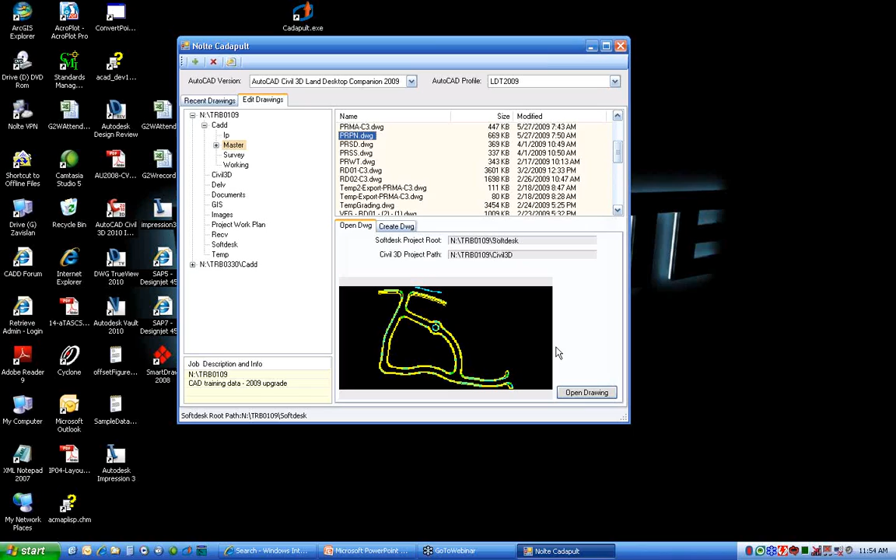So let me go ahead and open that up. You'll see that Cadapult did not have any tools to create or select a Softdesk project. The reason we chose not to do that is it was just a lot of extra work for us - we're going to rely on Land Desktop to manage and maintain our projects for us.

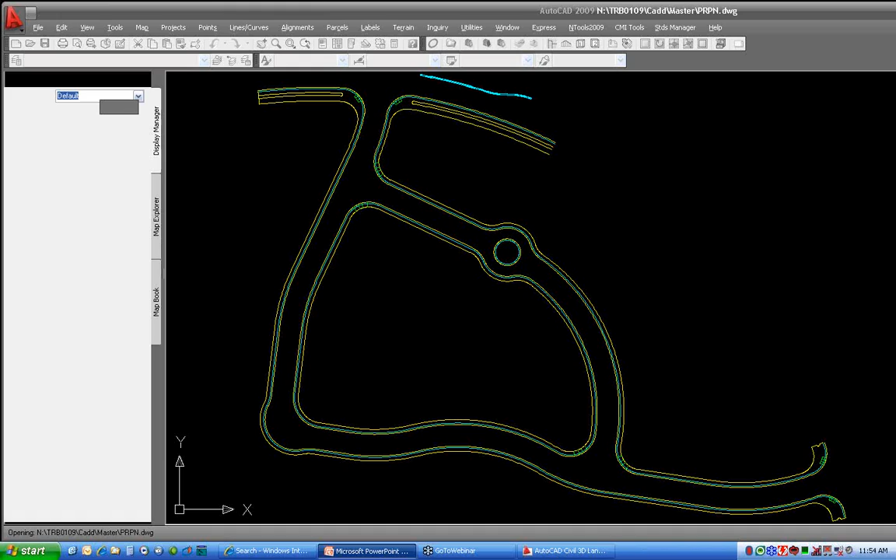So as this fires up here, and I apologize - you should notice that the 2009 products do take a little bit longer to load the first time every day compared with 2007. Just like any software, you add more functionality, it's going to require more hardware, more RAM, more memory, more resources, so it will take a little bit longer to open these files than what you're used to in 2007. If you're finding it's drastically slower, where it took only a minute in 2007 but takes 5 minutes in 2009, then you need to work with your PC analyst - there's probably some hardware configuration issues we need to correct.

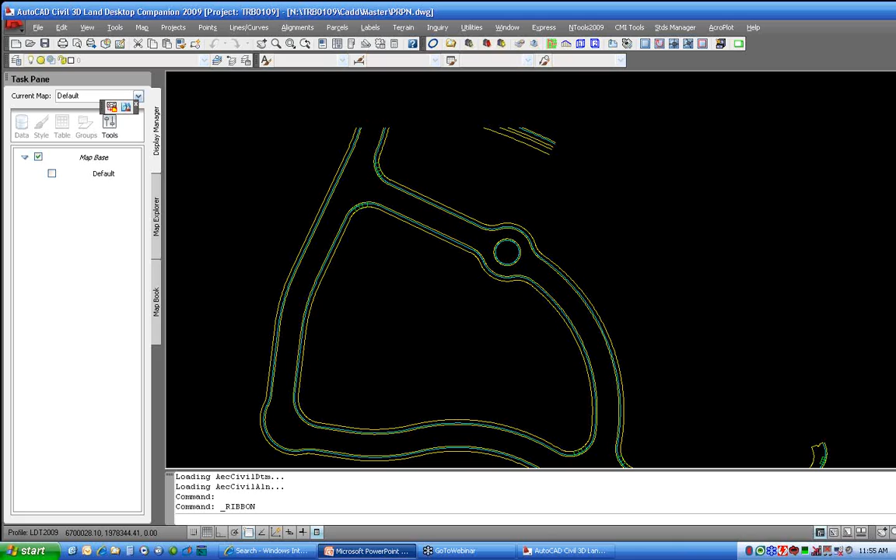All right, so come in - I'm in my Land Desktop, and what you'll see is the first time you come into a drawing that does not have a project associated to it, you will get this dialog here where it's going to ask you to select or create a project. You do need to make sure, again, if you use Cadapult correctly, it should have the right job number, and then you should be able to select from the list of projects in that job.

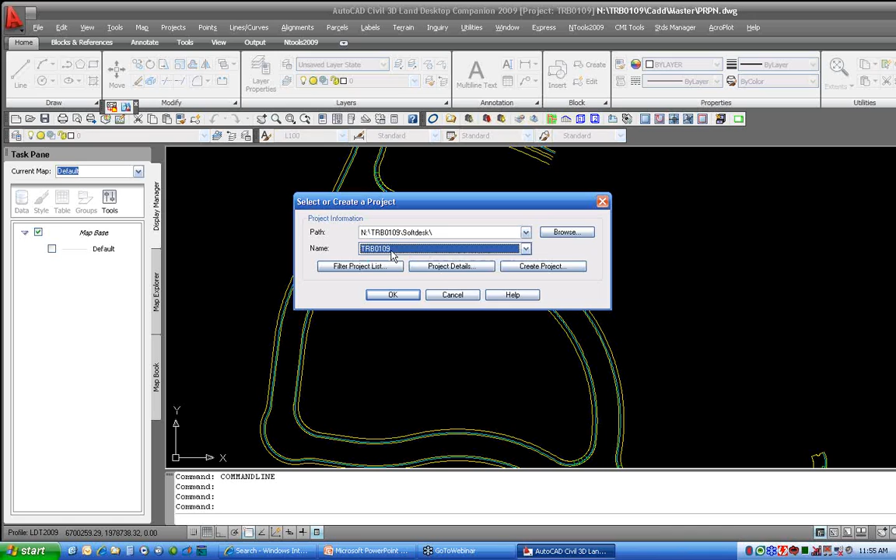Other thing I want to point out while I'm in Land Desktop: if I do the open command in Land Desktop - let me actually get, well, we'll go ahead and leave it like that, that's fine, I got my AutoCAD going off the screen here. It will open up the project, but you may find that it is not looking in the correct folder for drawing files. This is actually Land Desktop's open dialog, and it's a project-based dialog.

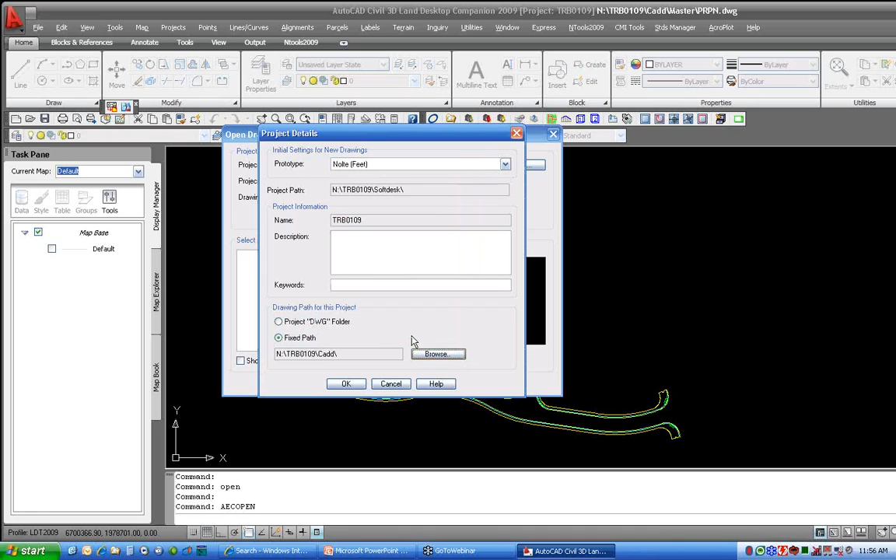So if it's not showing you the Cadd folder here, what you're going to need to do is go into this project details button. Down at the bottom, toggle fixed path, because the default will be DWG folder, but select the fixed path option, and then you want to browse to the Cadd folder on your job. I'll pick OK to that and pick OK, and that only needs to be done once on any project - once it's done, everybody who connects to that project will use that folder.

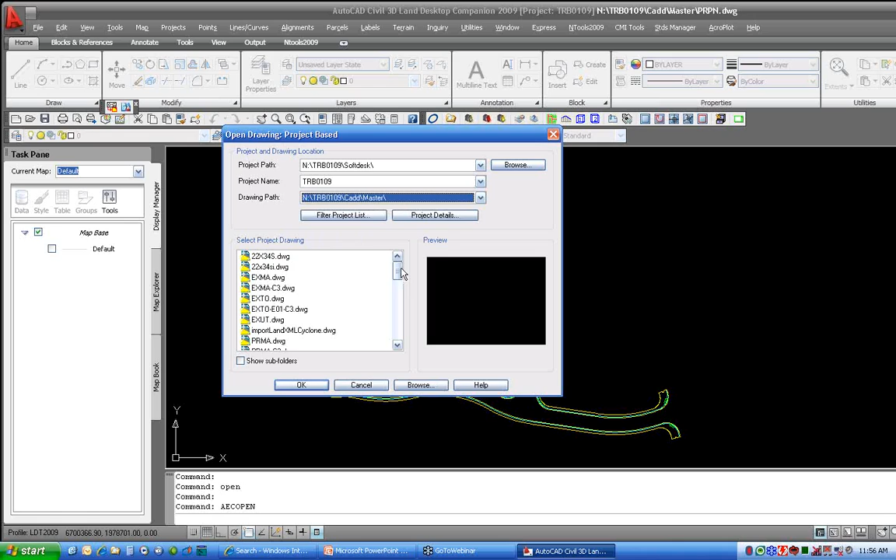I don't have any drawings in my Cadd folder, but what I can do now is come down to my list and say, well, here's my master folder, and I can now open up drawings from my master folder here. Just like in previous versions, Land Desktop is only going to let me have one drawing open at a time.

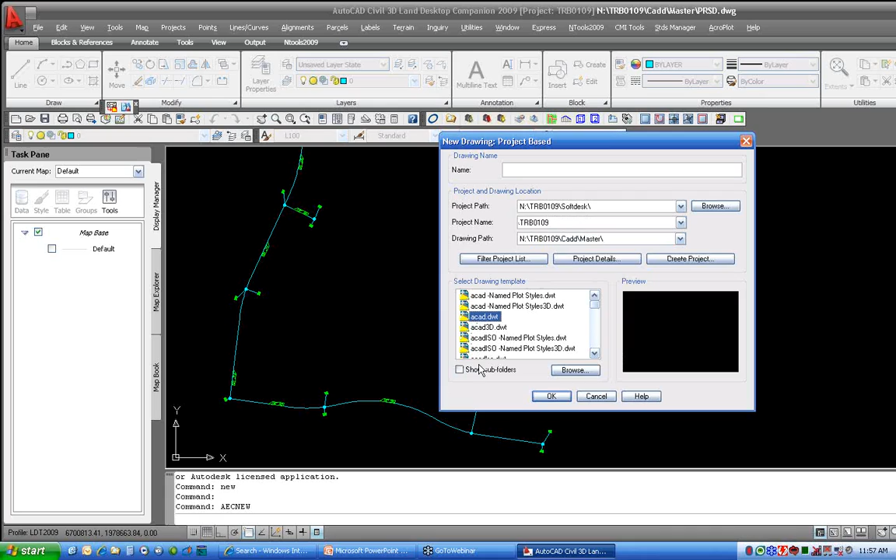Same thing when I do the new command in Land Desktop. I'm going to get the project-based new, where I tell it my drawing name, make sure I get the right project path, the right project name, and then select which folder I want to create the drawing in. I can select my template, click OK, and create my new drawing.

Just a little difference there for Land Desktop. Again, the online handout goes into a little more detail and has some demos showing how to do those items. Okay, let me close that down. I'm not going to save that.

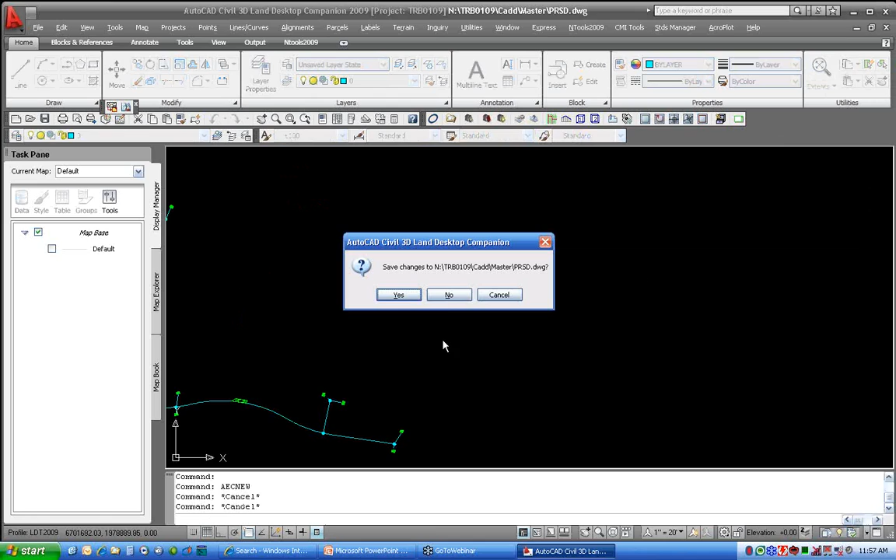All right, let me go back to Cadapult. I'm going to do it again, but this time I'm going to open a drawing using my Civil 3D, which will allow me to progress into the rest of my presentation here. I've got some sample files I'm working with.

To create a drawing, we switch over to this tab, and you can select your template files at this location, then down at the bottom you type in your new drawing name and hit the Create New button. If you want to select your template file from another location, there's a File Browse button which lets you browse to a different folder to locate your template files, and the Reset button will reset this back to the default folder where AutoCAD stores the template files.

Before I get much further, the Recent Drawing tab shows you only the drawings you opened with Cadapult. It does not, at this time, show you anything you opened while inside AutoCAD itself. It's only ones we opened with Cadapult.

We've also segregated these by version. So if I go to my 2007, we'll see I haven't opened anything with this one. I've opened those four with LDT 2007, and the reason we did this is so as you migrate up to 2009, you don't open any 2007 drawings.

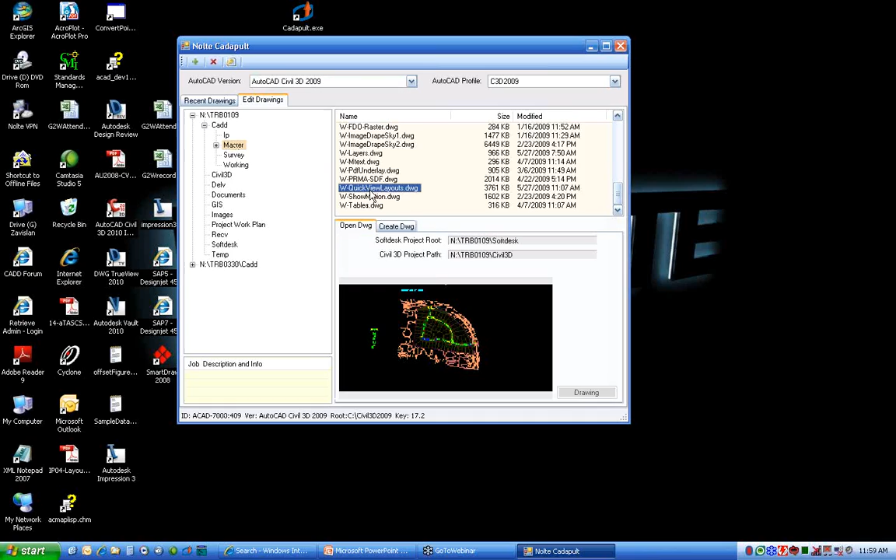Okay, so let me go back into 2009. I'm going to open that drawing. All right, I'm going to say that's enough for Cadapult here. Let me jump back into my PowerPoint.

All right, so we talked about Cadapult in terms of my AutoCAD. Let me introduce some of the items here. What we'll talk about today is, first off, let me mention file compatibility. AutoCAD 2009 uses the exact same file format as AutoCAD 2007.

Where we're going to have issues is the Civil 3D and Land Desktop objects. So for those of you using Land Desktop, a Land Desktop contour or point object in 2009, if you try to open that drawing in 2007, you'll get some errors because Land Desktop 2007 won't know how to deal with those objects. Same thing with Civil 3D.

On a job that you're working on, you're going to need to use Land Desktop 2007 until everybody on the project has been upgraded. At that point, then you can start using 2009.

Okay, to go back to 2007, you're going to have to use that File Export to AutoCAD command in Land Desktop and Civil 3D to be able to give these drawings to sub-consultants or clients using older versions of AutoCAD. All right, file format.

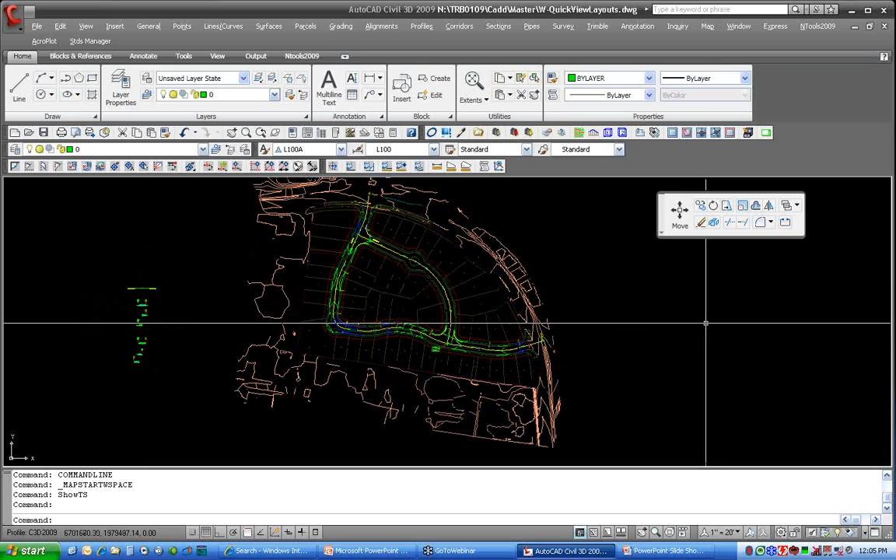And then when I'm done with this, if I hover on it, you'll see the menus expand here. And I have an option here to send it back to the ribbon, and it will park it back up here in my ribbon. Okay, so you've got different categories.

One I've used a lot, and I'll show this next week when I do annotative text and dimensions. I've been using the annotate panel or ribbon group quite a bit just because it throws all my annotation tools into a nice, easy-to-use interface. I can see which styles I'm using. I've got my commands to apply dimensions. It's all a real quick and easy interface.

I've also created an NTools panel, which has all of our NTools commands and buttons to launch all the different NTools applications that we have, just to get a little practice and give you some alternatives to getting into those tools as well.

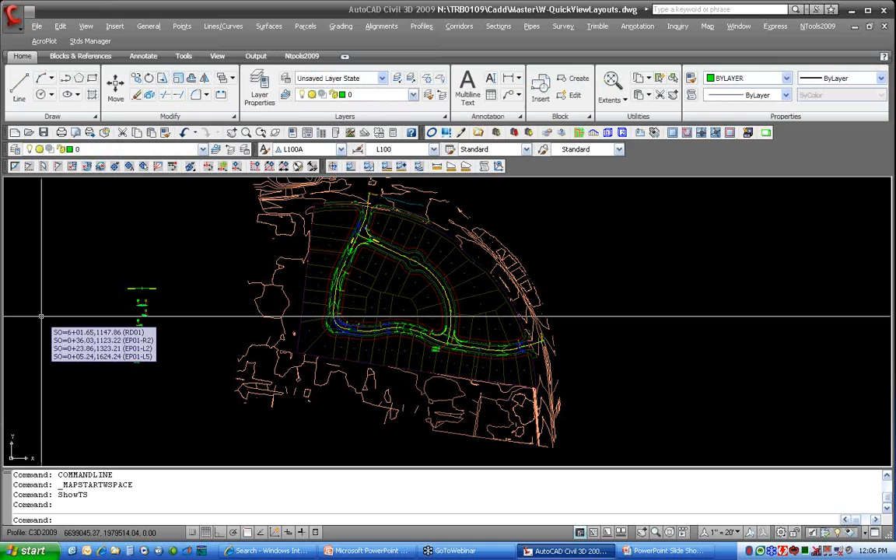All right, so that is the ribbon. Let me come back onto here. A couple things you'll see also as I'm hovering around. The tooltips have been modified also in 2009, where if I leave my cursor on a button long enough, I will get what's called an extended tooltip where it actually shows me a little bit more information.

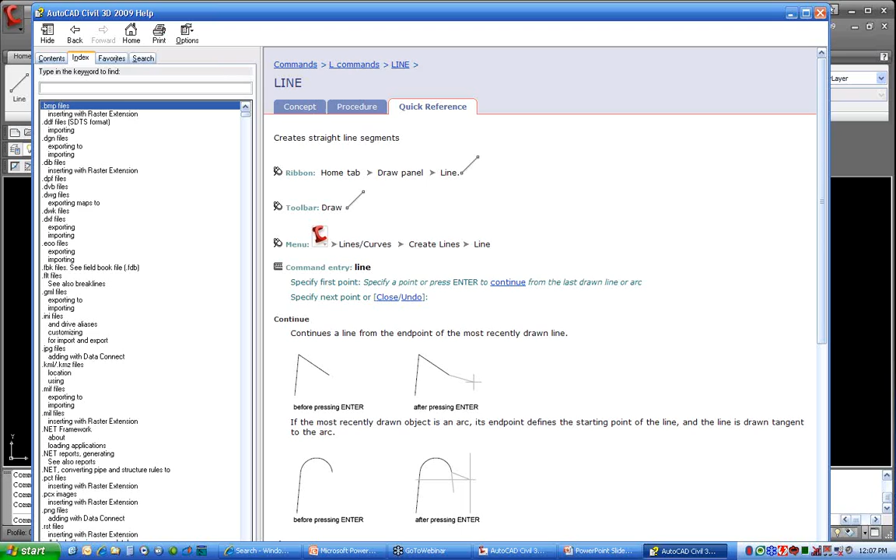I can also hit the F1 key at this point and it will launch the help. Let me bring that back over to my screen, and it will launch the help application with whatever button I was on loaded as the content.

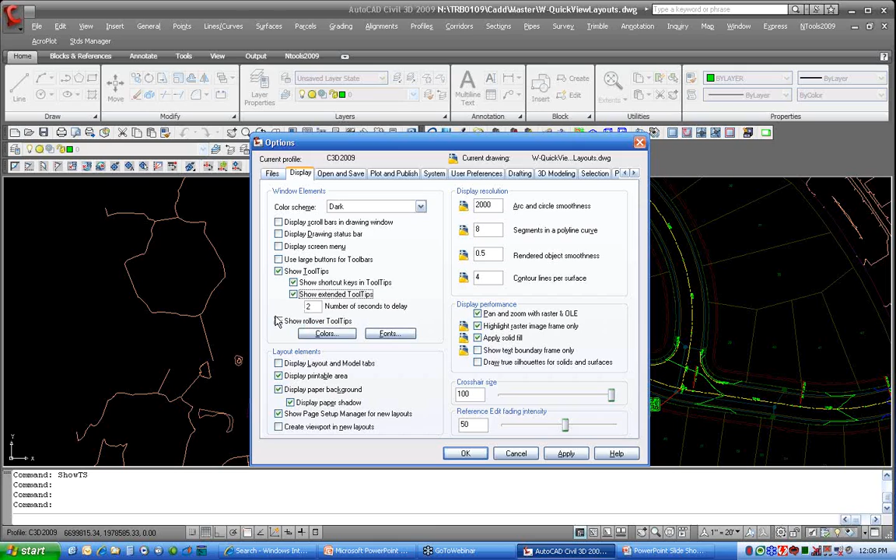We're starting to find that AutoCAD performs a little bit better with these features turned off. For now I'm going to leave them on, just because I'm trying to demo some of this functionality for you.

All right, so that's the ribbon. If you don't want the ribbon, the command is RIBBONCLOSE, and that will close the ribbon. If you want it back, you can type RIBBON and that'll bring it back. You can also restore the ribbon by restoring your workspace.

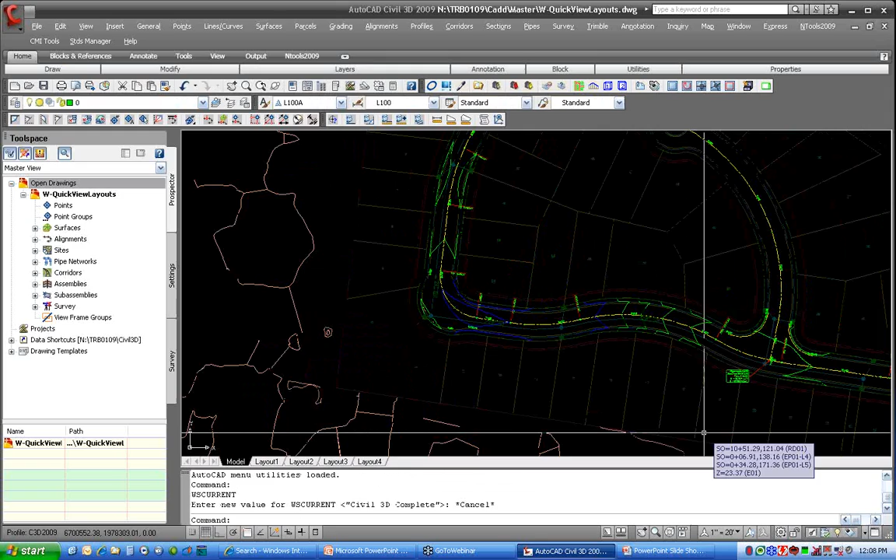The workspace now - we don't have a workspace toolbar anymore. It's now done through this little gear button down at the bottom on the status bar. I'll click on that and you'll see here's all my workspaces, set up very similar to what we had in 2008. So you'll see I restore my workspace, the ribbon comes back, and since this was Civil 3D, my Civil 3D tool space comes back as well.

I can also, through the workspace button, save my own workspaces, and fire off the customize command to load additional CUI files or do any customization you'd like if you want to make your own toolbars. So that's now done off this button here on the status bar.

Just like Microsoft Office, we now have a big button up here, and this is called the menu browser. Let me click on that. It shows you a listing of all your pull-down menus, so you can actually close your menu bar and access your pull-down menus right here.

As we come through, we can find our pull-down menus, and as I work my way in, we can click on things and get down into the sub-menus. The one thing I really like about this is I can search menus.

Say I'm learning Civil 3D and I want to learn how to do volume, so I can just start typing in volume here, and it'll search all of the menus and show me all of the commands that contain the word volume. So I can do surface volumes, grading volume tools, and also for corridor modeling and cross sections I have my section volume tools.

It also will find - say I'm looking for layer, here's all my commands with the word layer - but it will also show you related results where the command itself doesn't have the word layer in it, but the tooltip had the word layer in it.

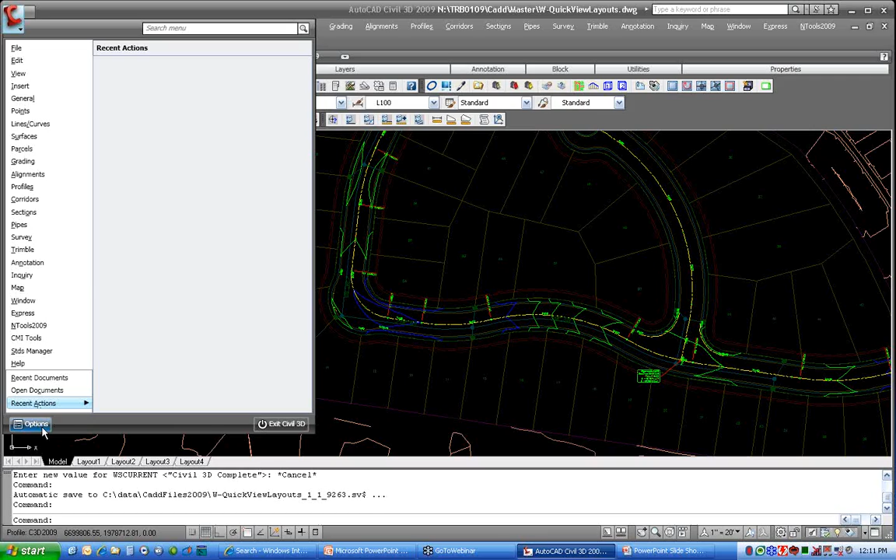Okay, and you've also got a button here that'll launch your options command. All right, and that's the menu browser. Again, it has the potential to replace our pull-down menus.

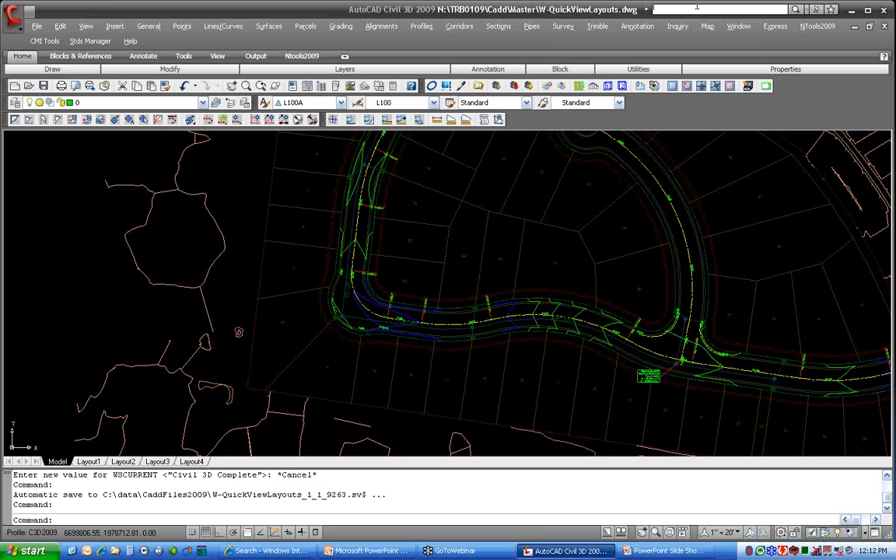Over on the right here at the top, this is what's called the Info Center. What they have done with this is it's a utility that ties in all your different help functions. So maybe I'm looking for something on volume, I'll click the search button, and it will go through and search all of the help files that I'm connected to, showing me all the commands with the word volume in it. I get my AutoCAD solid modeling commands that do volume, and then I also have my Civil 3D help file.

Plus it also goes and searches the Autodesk online, so I can actually find help from the Autodesk website, from their knowledge base, directly within AutoCAD here.

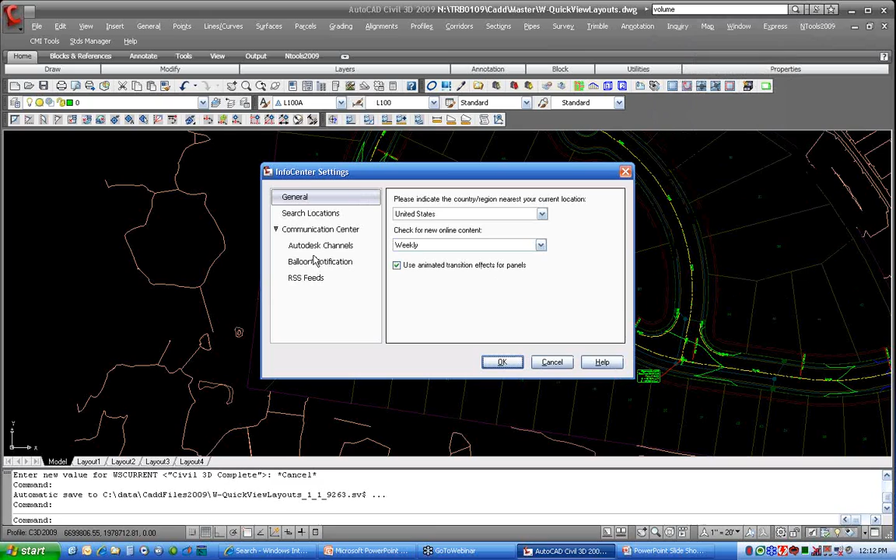All right, to customize this, let me go into this button right here. It says Info Center Settings, and what I need to do is I can set search locations, and you can come in here and actually add in additional help files. So I can add in, browse, and go to my Autodesk here.

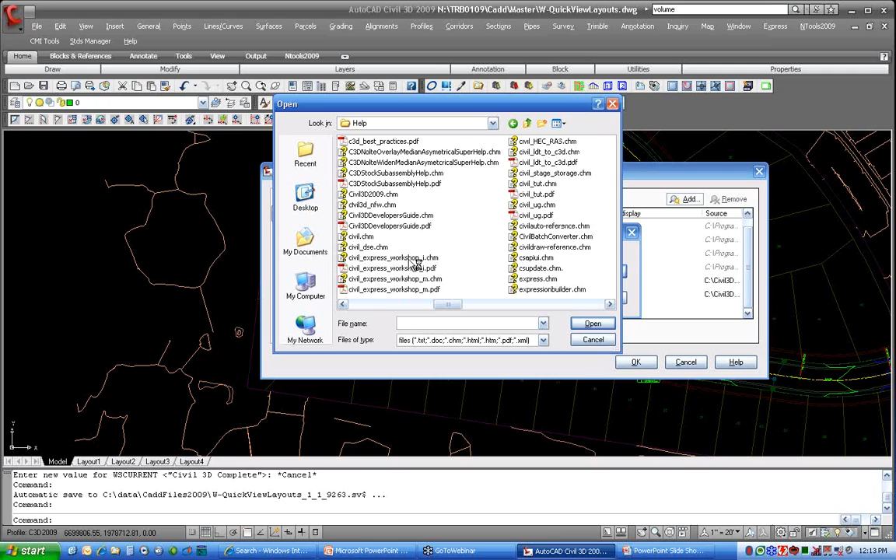I'm in Civil 3D 2009, and I can go to my help. If I can find help, there it is, and I can pick which help files I want to be searching for. So I can say I want to look at my Civil 3D New Features Workshop, and add that one in.

Okay, so that one is now added in. It shows up down here, and let me pick OK. So now when I do my search, it will search, and I can see in the New Features Workshop it found those additional new features.

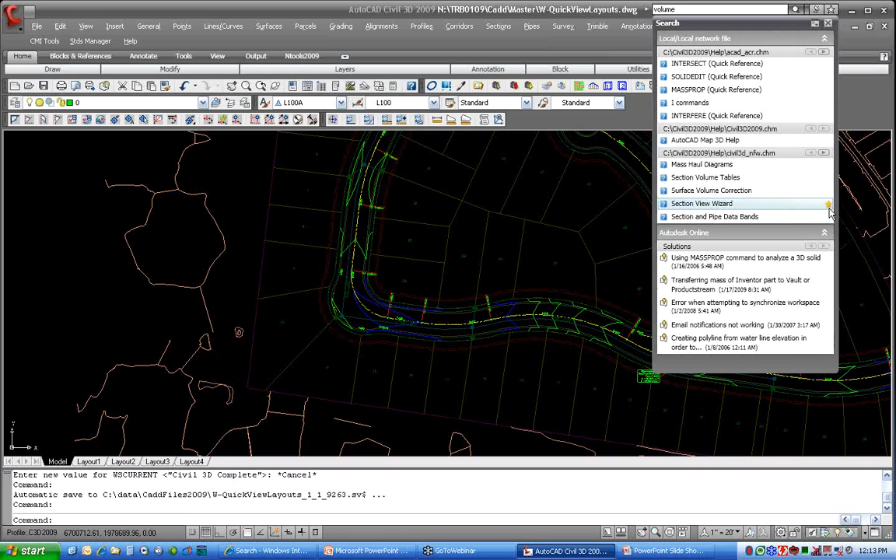If you like one of the help items, you can come over here and click on this little icon on the right, and that will add it to your favorites, which I can then get to by clicking on the star button here, showing me the favorite items I've added in. I'll go ahead and clear that one from the favorites.

All right, real neat utility. So instead of going out and trying to figure out which help document to search, I search here, and it will search all the ones that I've applied.

The little satellite dish here is a communication center tool which links you to the Autodesk websites, and you can get into the e-learning catalog. That's all the online tutorials that Autodesk has for learning their products. Great tools for those of you who want to learn more about AutoCAD and Civil 3D.

And they've also got these articles, and I would really think about getting rid of these Techno Chronicles. They're stupid little AVIs that they have. It's kind of like a YouTube site, but they're not anything of real compelling content. Kind of a waste of time to watch some of these.

But definitely use the search capability here for the Info Center, some good tools here.

All right, moving my way around here, status bar, a couple of changes you'll see is my buttons now have icons. If you would rather have the words, you can right-click on any of them and change Use Icon, and it'll be back to the words you're used to using.

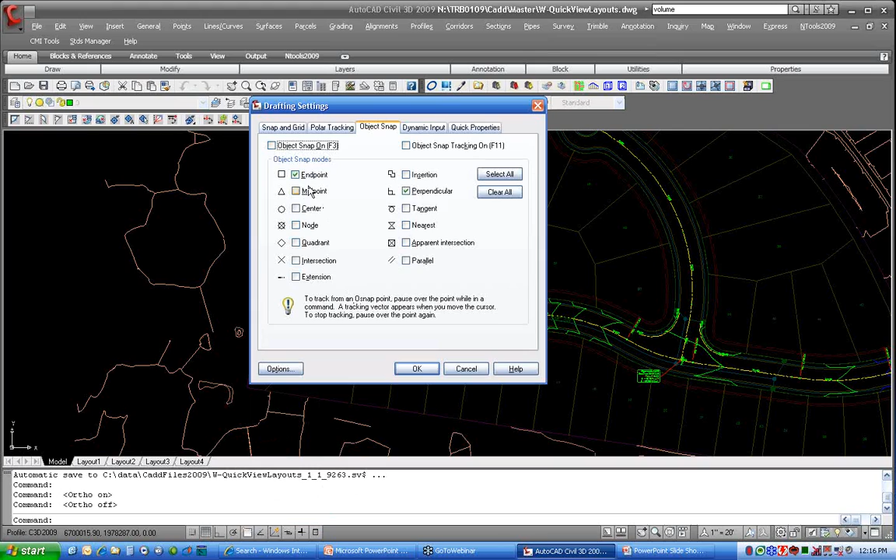So that one is now on. So now when I right-click, you'll see that both endpoint and perpendicular are toggled on. It's a nice way of doing it instead of having to come into the settings and toggle them on and off there. I can do it right off that menu.

Same thing with the polar osnap. If I right-click on polar, I can quickly select one of the default angles they have for polar osnaps, as opposed to having to go into settings to enable those.

All right, new button on here. This is quick properties, and I'll try to show you that in a little bit. All right, so that's the settings buttons.

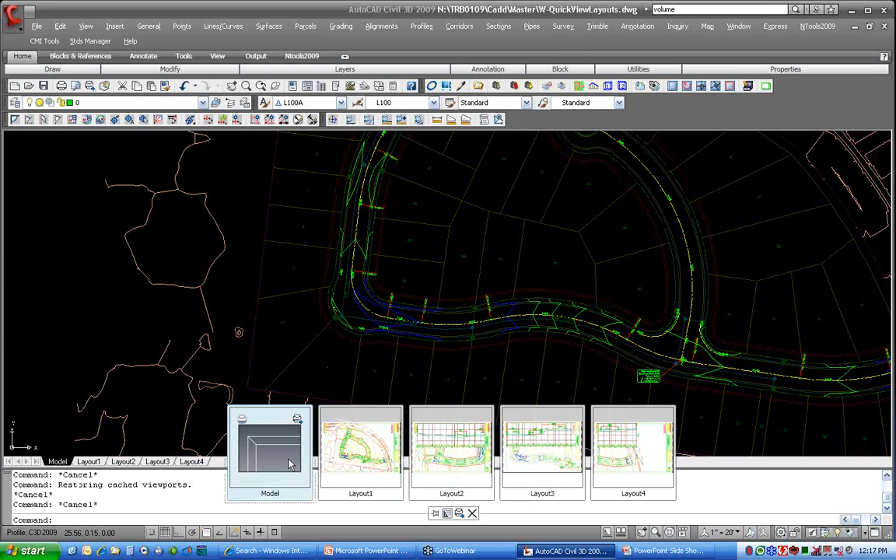A couple new commands here. You have what's called quick view layout. Let me pick on that one. What that does is it opens up this little utility where I can see thumbnails of all my active layouts in this drawing. I can hover on them and select one of the views or icons, and it will switch me to that layout, or I can switch back into model space. You'll also see as I hover on these, I get buttons at the top where I can plot this layout without first switching to it, or I can publish this layout. This button here is plot, this button here is publish.

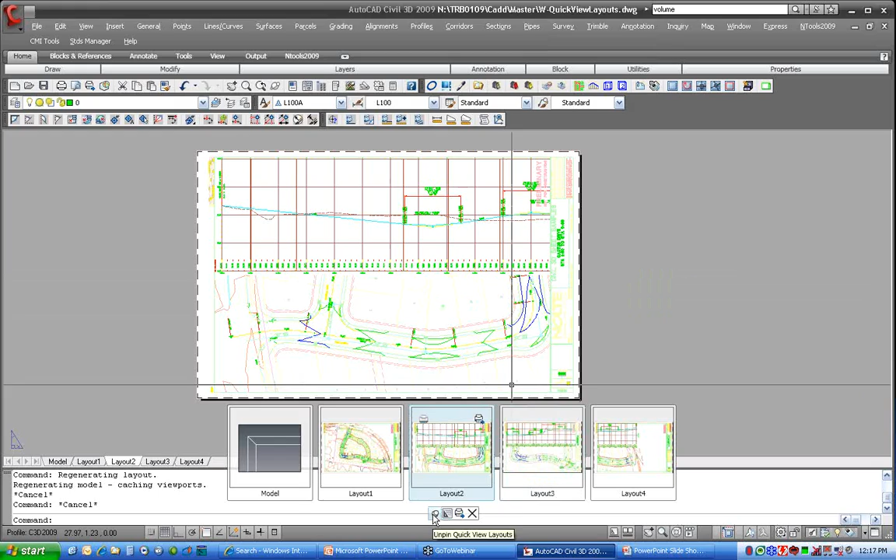I can again just quickly switch through. I can pin this utility open, so as I go through and do other commands it'll stay open, or I can unpin it, so when I do other things in my drawing, that will close off.

All right, let me open up another drawing file here just to have a little bit of variety. So I'm going to open up my mapping. Let's do planimetrics.

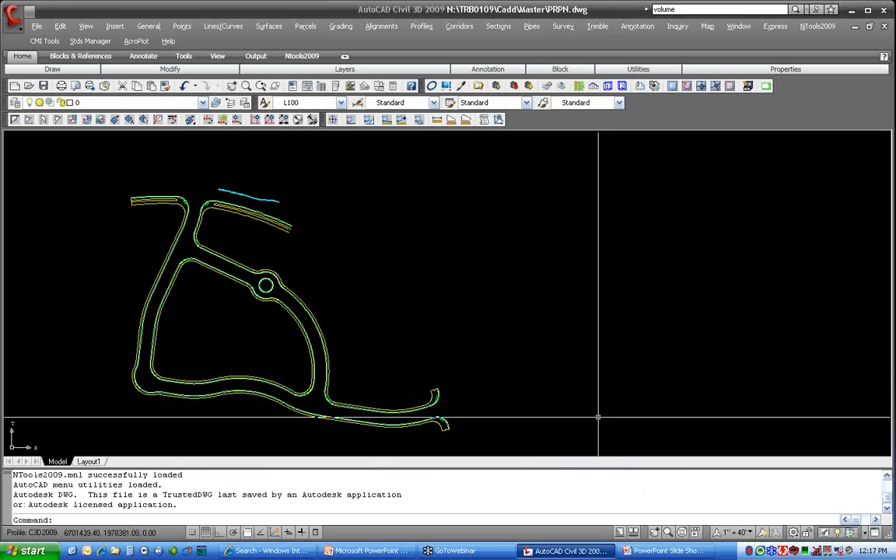Okay, the other button on here, the reason I did this is so we were looking at quick view layouts. They also have one called quick view drawings. Let me click on that one. It will show me all open drawings.

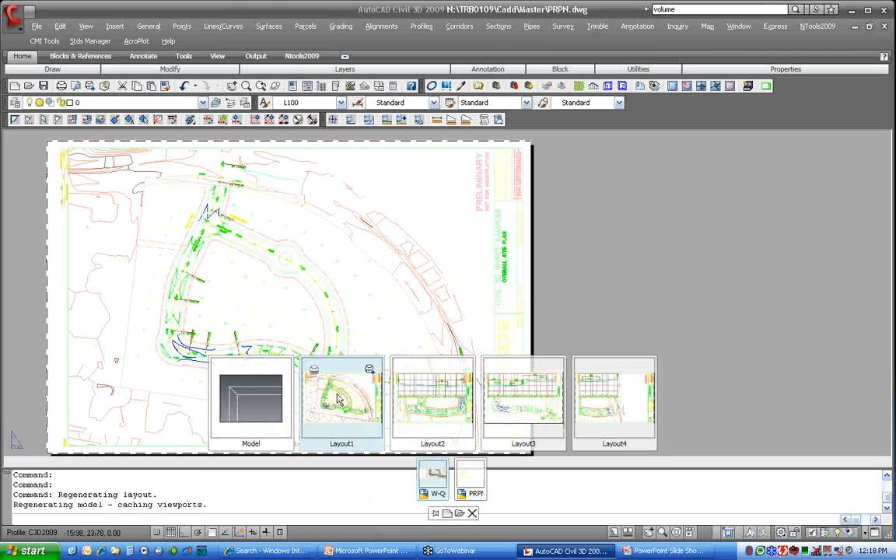So here's my current drawing. But then as I hover on them, I can actually get down into the layouts and work my way in from drawing to drawing. So I can say, well, I want to come to this drawing, but I want to go to that layout. Or I can go to model space from here, or I can go back to my other drawing into its model space.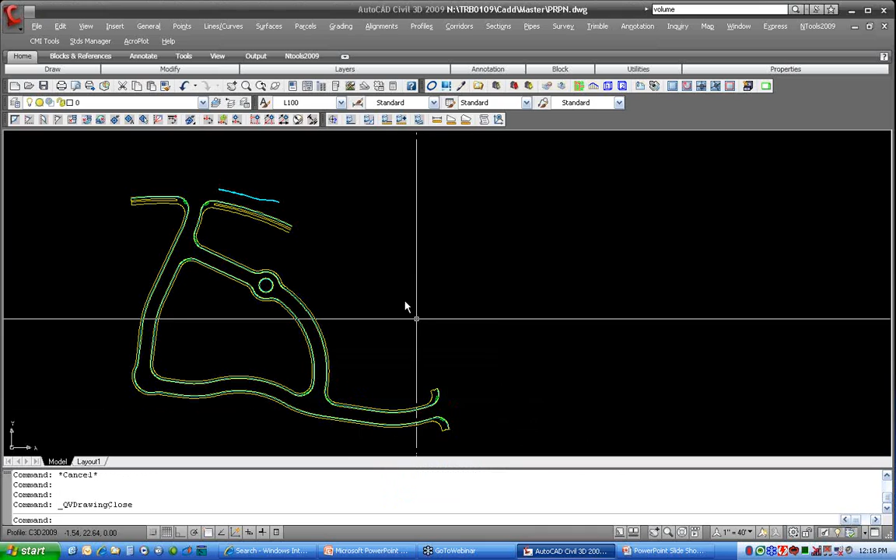Like the quick view layouts, I can pin it open. It has new open commands, and then if I want to manually close it, I can just click on that button there to close those down. All right, since I brought this drawing up, let's look at a couple of things.

There's that hover tooltip I mentioned when I was looking at the tooltip options in the option dialog. You can see as I hover on an object, it will show me what that object is, what layer, what color, and line type it's using.

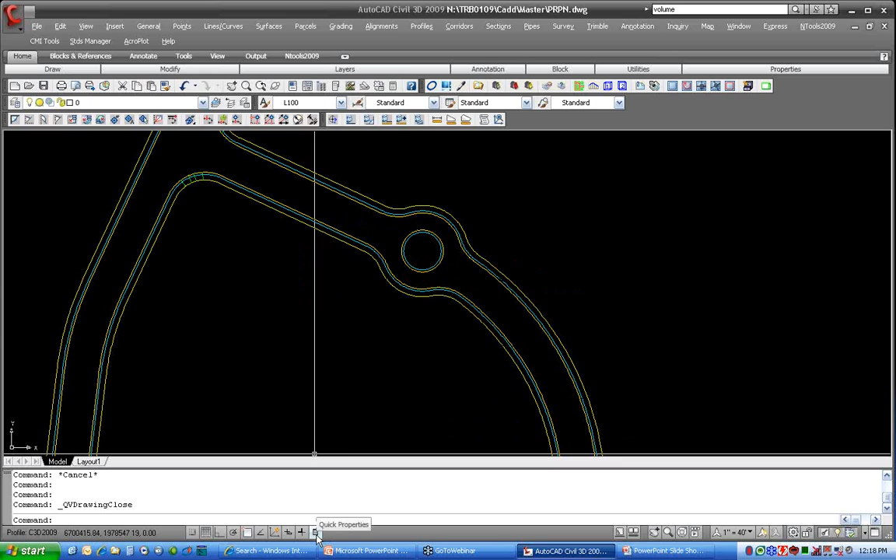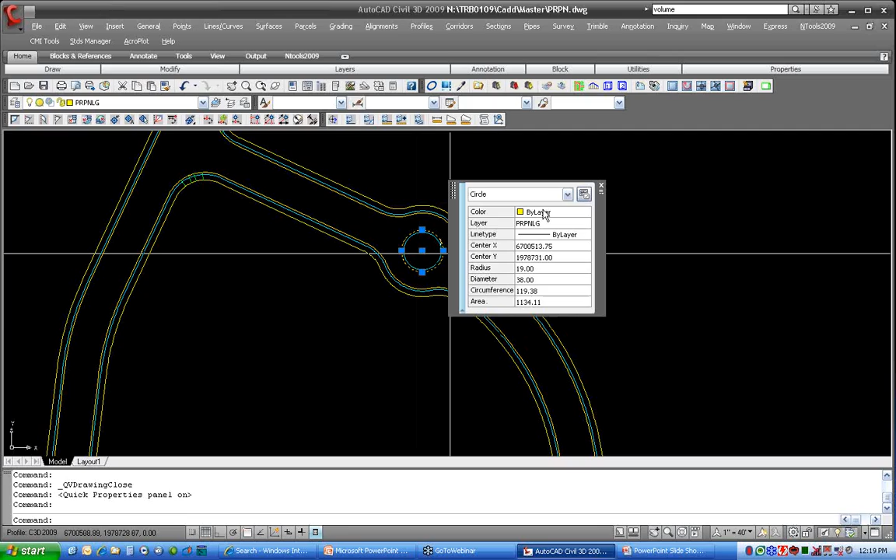I can also do something similar here with what's called quick properties. What this does is as I select an object, I will get an abbreviated properties window that only shows me selected properties for that object. Then if I hover on it, the dialog will expand to show a few more options. So I can come in here and change layer, color, line type, any of my basic properties for that object. Let me click on this arc so you can see I get it for an arc.

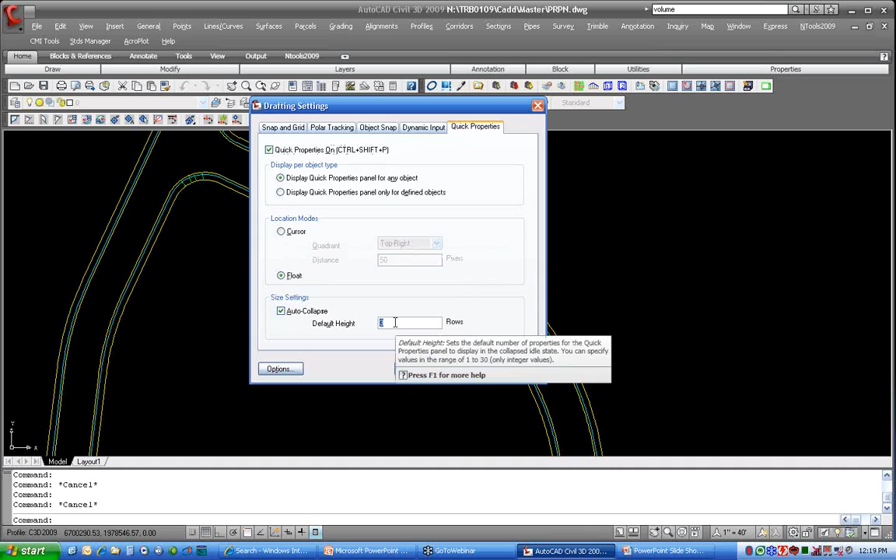Things you can customize for this, let me go into settings. So I right-clicked on it, I'm going into settings. We can control where it appears. Right now it's defaulting to locate near my cursor, but I can say let's make a floating location, and I can also set down here how many lines to display. This is why it was only showing me 3 lines initially. Let me pick OK to that.

So by doing a floating location, I can actually drag it anywhere I want. So now no matter what I pick, it will always show up in the upper left corner there.

All right, I can also get into the settings or options for this by clicking on this little button here, going into settings, and again I'll say I like it actually showing up with my cursor. So now when I click again, it will show up with my cursor and I can change those properties. Neat little tool.

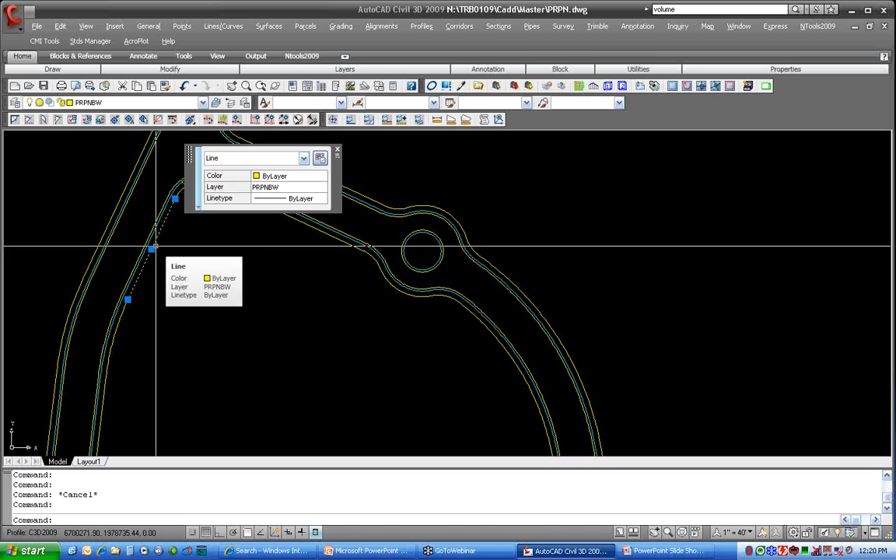However, this is one of those things where the tooltips and quick properties are going to impact AutoCAD performance, especially for really large drawing files.

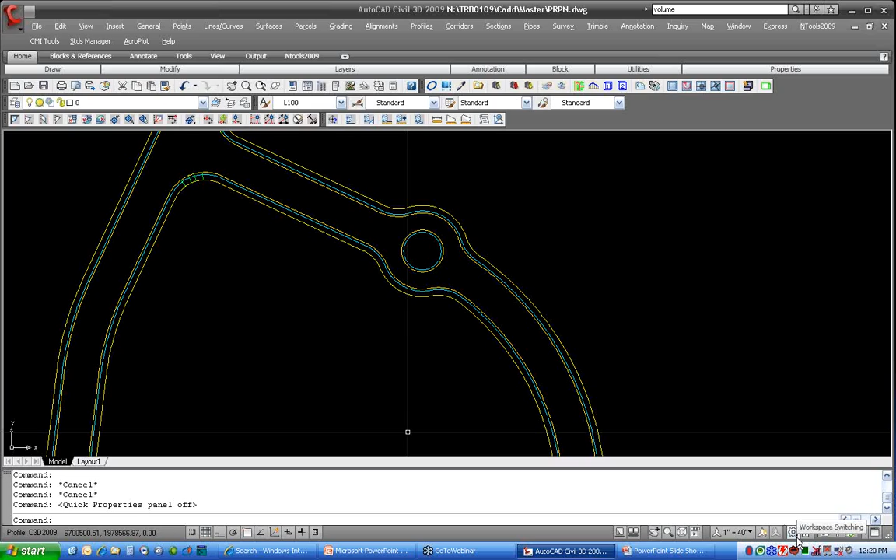So let's go back in here. That was quick properties, we looked at those options. Next week when we look at 3D viewing, I'll show you the steering wheel, and if we have time, show motion. When we do annotative text, we'll talk about these buttons where you can control your annotation scale. We looked at workspace switching here, so that brings us around to cover some of the new features.

All right, so we did quick properties. Let's take a look at layers here. I'm going to open up another drawing with some layers set up to show you some of the new layer features.

All right, so I've got a drawing with a bunch of XREFs and a bunch of layers in it. We're going to start off, and I'll use the button here to open up my Layer Properties Manager.

A couple of things you'll notice initially is that, just like my XREF or Properties toolbars or tool palettes, I can park it off to the side, let it collapse, come in and do AutoCAD commands, draw some lines, whatnot. And if I need to manipulate a layer, I can hover on it and get my layer dialog. So it's a modeless window now.

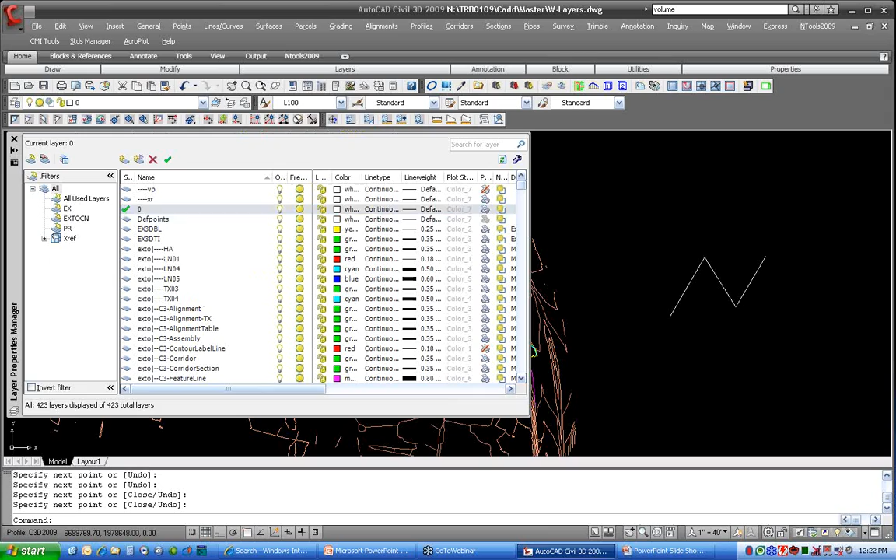Again, there are performance issues, especially in paper space or layouts working with viewports — this does get very slow, so you may want to close it down instead of leaving it open all the time. In this mode, you'll also notice there's no OK or Apply button.

Changes are instant. So I've got my lines I just drew, on layer 0. If I change the color of that layer, say to green, as soon as I pick OK on the color dialog, that layer changes. Same thing if I change the line type — say I go down to hidden, pick OK, and as soon as I make the change, it's automatic.

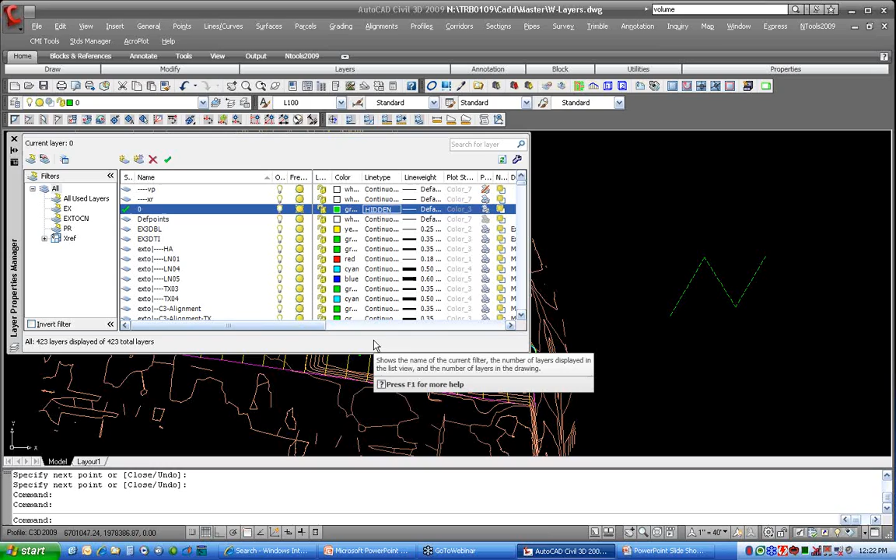If I freeze my XREF layers, all my XREFs go away. Let me move this out of the way — see, all my XREFs went away, and if I thaw those, boom, here they are right back. They come back instantly. So real-time, instant feedback on these.

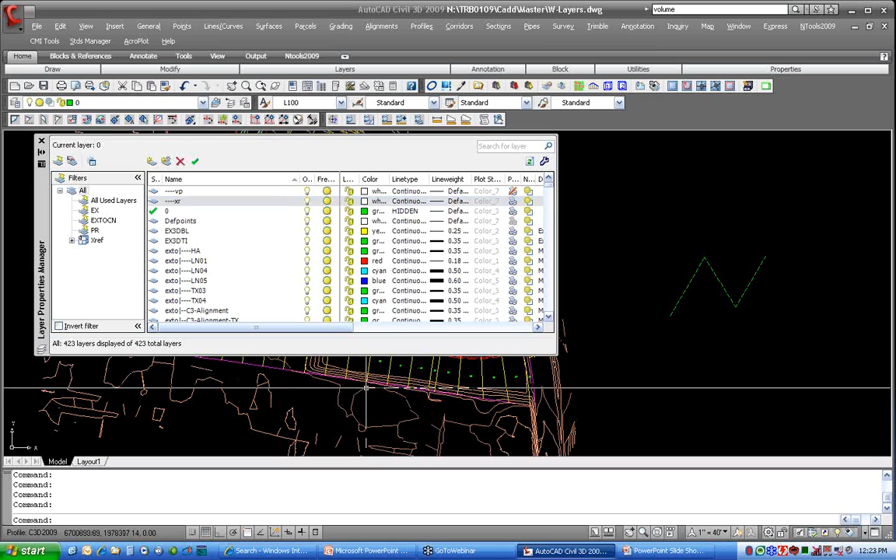Okay, a couple of other items with this. Let me switch to my layout. I've got a couple of viewports here. All right, so I've got two viewports. I'm going to double-click on the viewport on the right.

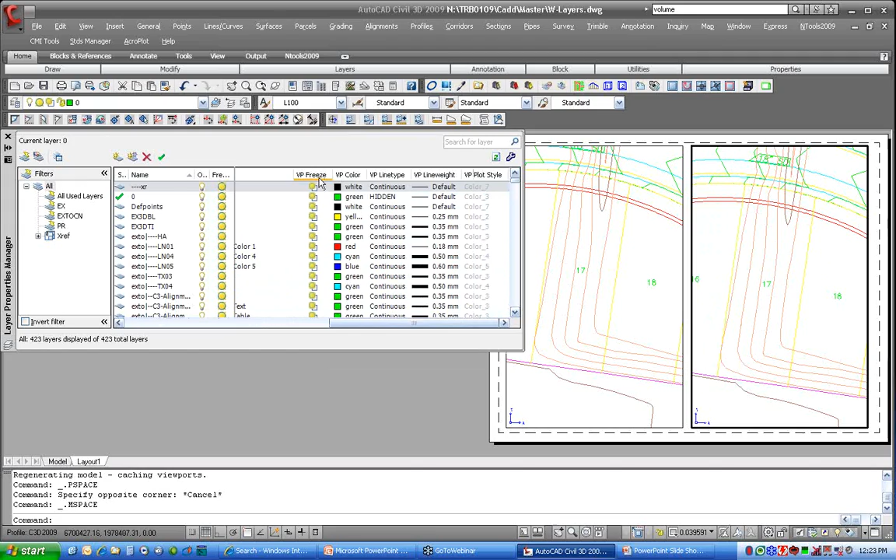While I'm in a viewport, if I pan across here, we'll see that in addition to viewport freeze, I can now set color and line type by viewport. So I can make line work different colors in different viewports, and I no longer have to have dozens of different layers.

The other thing I hope you'll notice, as I move this back and forth, is that my columns are locked here, so my first three columns stay where they're at. I can right-click and tell it to unfreeze a column, and now the whole thing moves. I can come back and right-click on my name column to freeze just that one, and now as I scroll back and forth, my name column stays put so I can see which layer I'm working on.

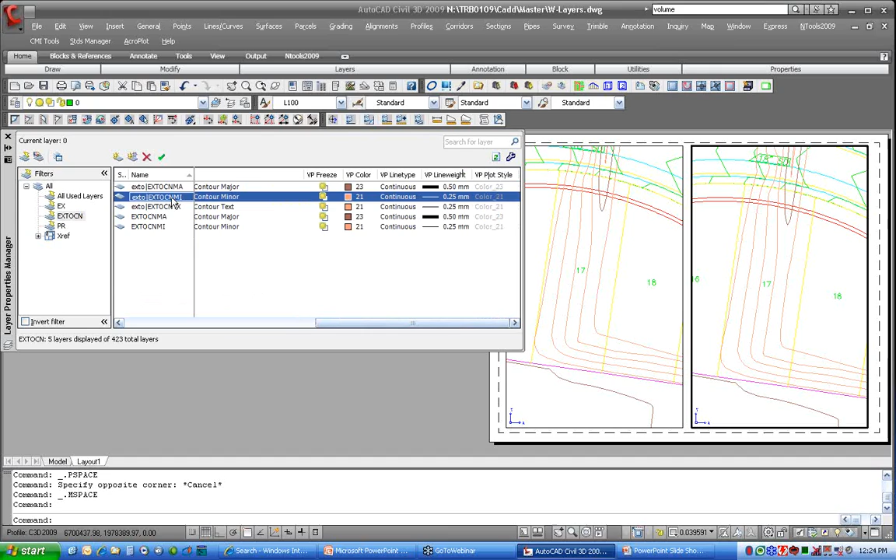All right, so let me show these viewports. I actually have some layer filters here, and I've got my contours — I think these are in the XREF, if I remember right, it's been a while. I'm going to come in here and select both my major and minor contours, and change their color — let's go red. So we'll see those are now red, and then let's change the line type too, and we'll go hidden.

Let me check my scale. Oh, I want my scale to be 1. There we go, had a bad LT scale there. So now my line types show up.

So now in this viewport, you can see those layers are red and hidden. You can identify layers that have overrides by a couple of clues: first, you get an override icon, the little viewport override. Plus the layer name is highlighted in blue, plus the properties being overridden are highlighted in blue.

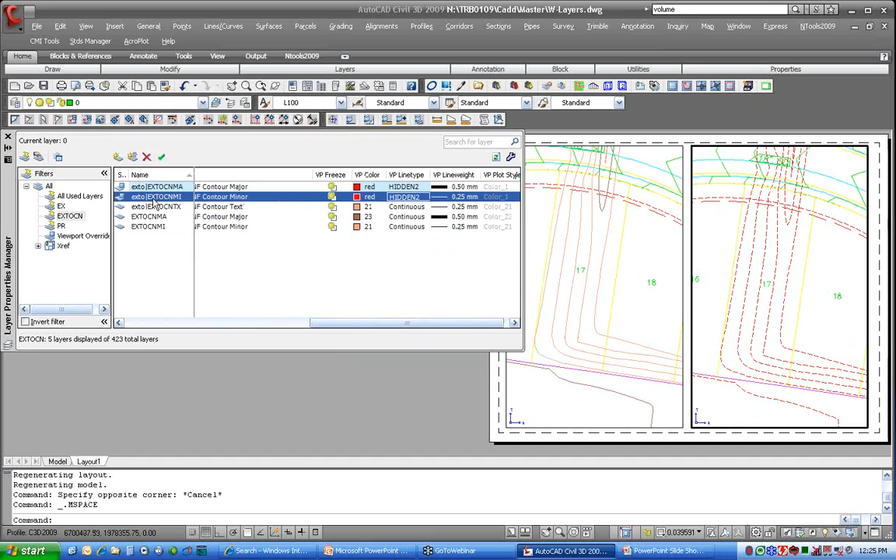To clear the overrides, let me come over here. I'm going to do just my minor contours. I'll right-click on that, and I have these remove options. I can remove based on the column I right-clicked on, by line type, in the current or all viewports, all properties for the selected layer in all viewports, or clear all overrides from all layers in the current viewport or all viewports. So let's just do the line type.

Okay, so that now clears, so you can see my minor contours are back to continuous, but my major contours are still dashed or hidden.

If I select both of these now, I'll right-click on my color and say remove color, in all viewports. So now they're back to color 21 and 23.

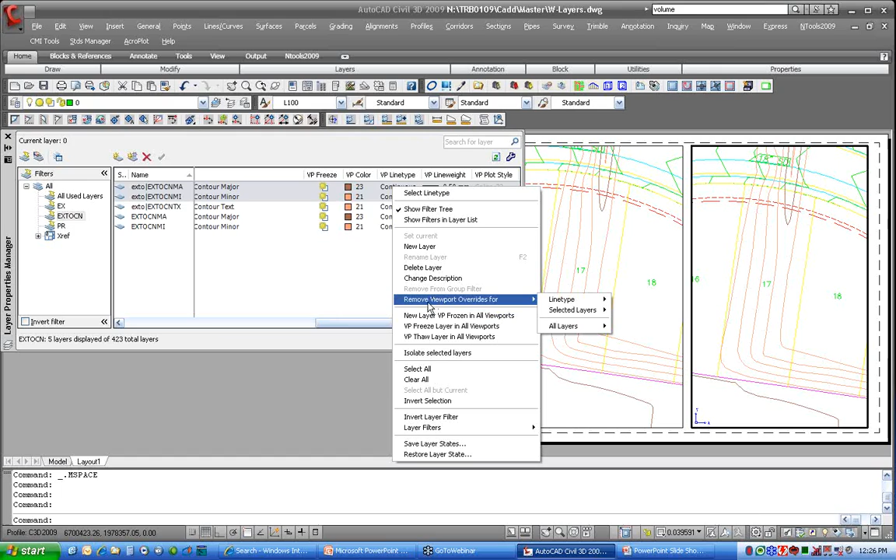I'll right-click on the layer name over here and just say remove the properties for that one. I can click on the layer or the box to change it, then right-click and I'll have the option to remove the overrides here. So I can do that by layer.

When you set the overrides for the viewport, if you save a layer state - where's my layer states? I forgot where those buttons are. There it is, Layer State Manager. It's been a while. It will actually save viewport settings for a layer for the layer states, and I can restore those into other viewports.

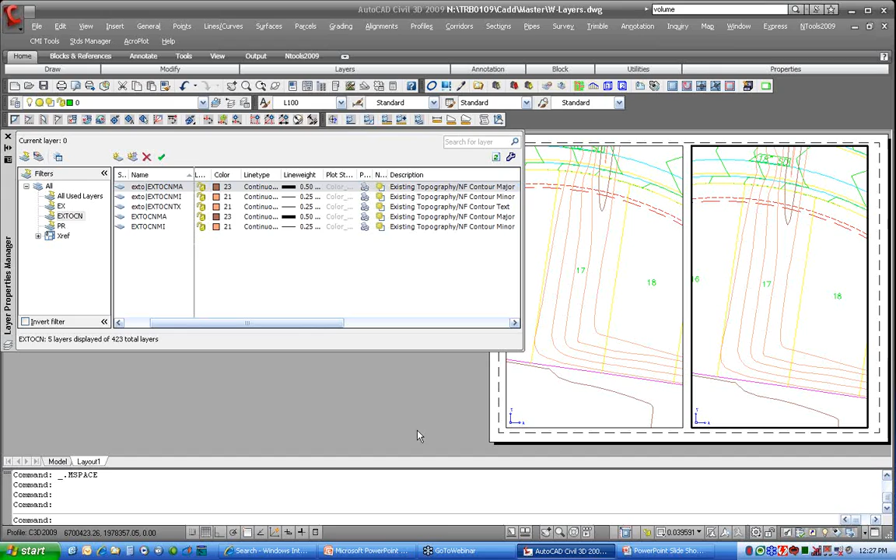Okay, a couple other things on the layer dialog - a little wrench button here. Let me click on that, and this brings up our layer settings. I've got about 5 minutes here to finish this up.

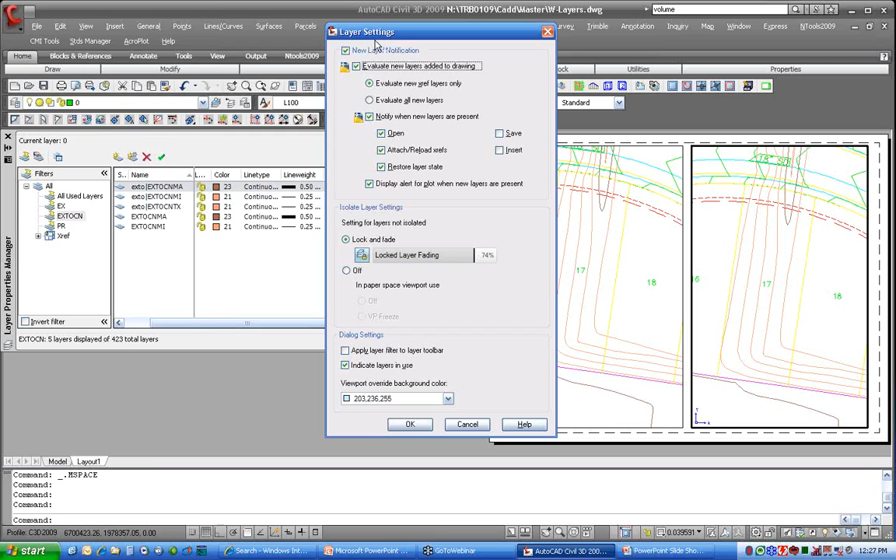New layer notification is what I want to talk about right now. This will show you whenever new layers are added to your current drawing or external references. So this takes care of that problem where I plot Mylars only to realize somebody had made a layer in one of the master files that I don't want to show up in my drawing. Okay, so we're going to look at this thing.

And the other thing we're going to look at is layer isolation. Instead of locking layers, or turning layers off or freezing them, when you lock layers I can actually fade them, so I'll show you that as well. So we're going to look at new layer notification and layer locking.

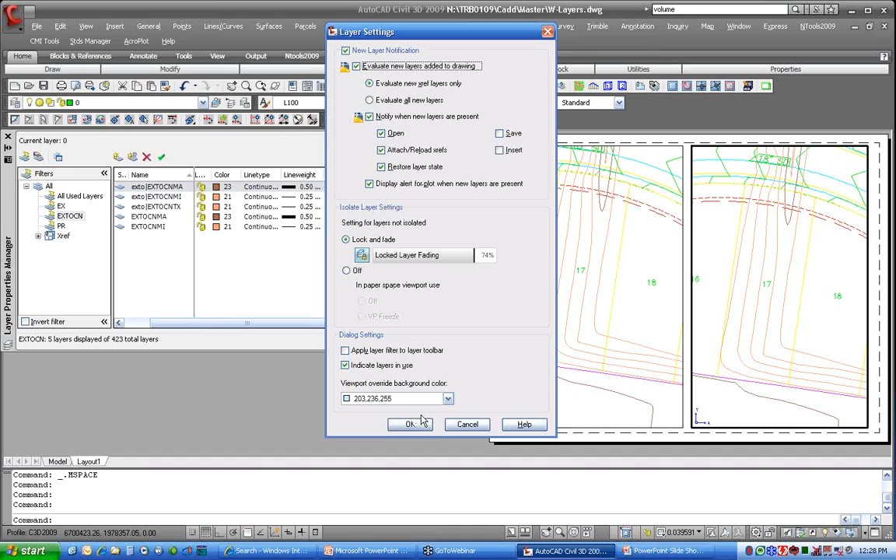All right, let me come back into model space here. Let me close my dialog. So what I'm going to do is grab one of my XREFs and open that XREF. And in this drawing, I'm going to make a new layer, my markup, and we'll set that layer current, and we'll just draw a P line.

You know, maybe I want somebody to do some work there, blah blah blah. Save it. Okay, come back into my regular drawing, reload that one. Okay, that line work is there. I don't want that to show up, but what you're going to see now is we get a new bubble or balloon notification down here that says, hey, unreconciled new layers. So AutoCAD now recognizes that a new layer has been added to one of my XREFs.

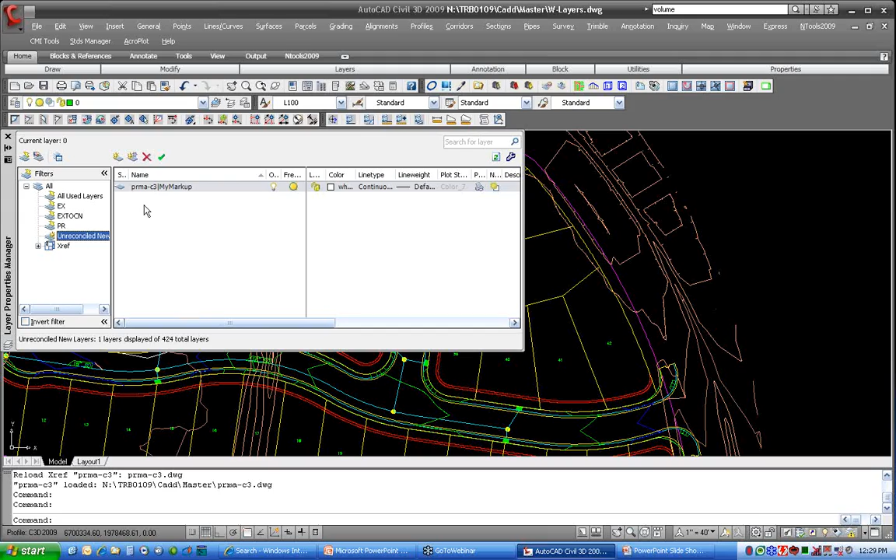So I'm going to click on the option here to view unreconciled layers, and that opens up your layer dialog, and there's a new filter here it creates called unreconciled new layer. So when I select that filter, you'll see, hey, there's that layer somebody made. I don't want that showing up, so I need to address what I want to do with this layer.

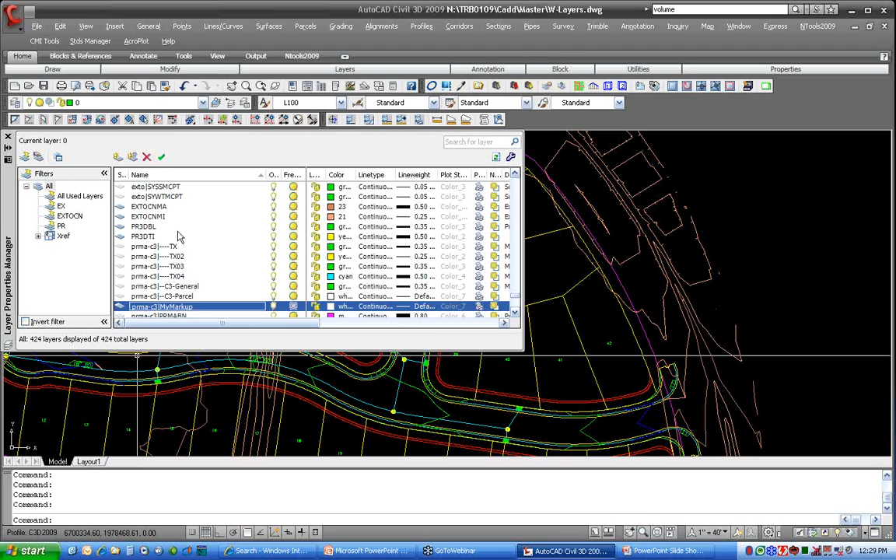Well, I don't want to see it, so I'm going to freeze that layer. So it's now frozen, and then I'll right-click on it and pick this option here to reconcile the layer. That tells AutoCAD I've recognized and done what I want with that layer; I now want you to reconcile and know that layer is part of this drawing. All right, so that's taken care of. Now if somebody adds a new layer to that drawing again, that will show up as an unreconciled layer.

So a real nice tool. You will also get an alert when you try to plot and you have not dealt with unreconciled layers. You'll get a little alert dialog that will pop up.

All right, layer locking. I'm going to do this off my tool palette here because I like this. They've added the layer isolate command to the palette. So I'll say isolate layer, and I need to think about what's in this drawing. I'll just go ahead and isolate my layer 0, and we'll isolate that.

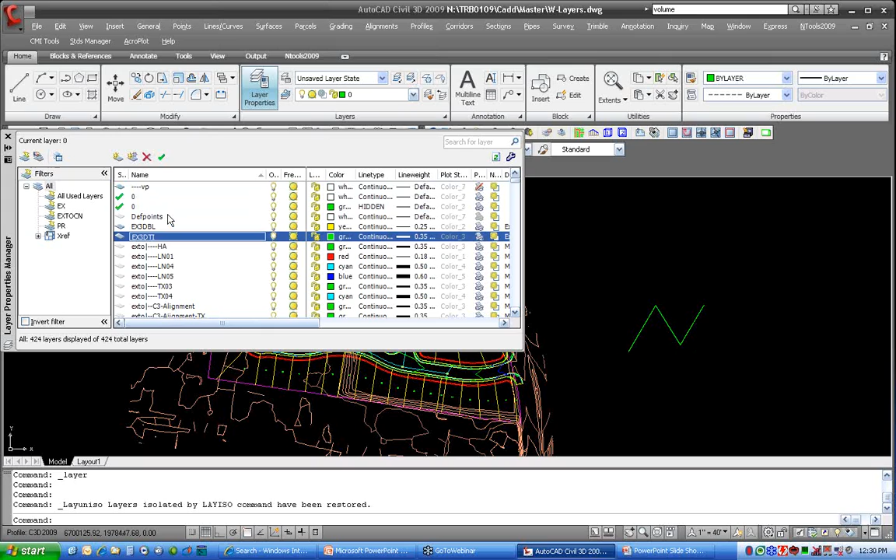So what it does is it tones down or screens all of the non-isolated objects, or all the objects on the layers I don't want. If I look at my layer properties here, you'll see it locked all of those layers. When I unisolate, it goes back and turns the locks off. A lot of times I'll come in and isolate or lock my XREF layer, and that'll turn down all of my XREFs to where I can barely see them.

On my layer tool palette, if I expand that, I've got a slider where I can change how intense the fading is. So I can fade it down, maybe to where you probably can't even see this through GoToWebinar, but it makes it nice that I can have these items dimmed down so they're not distracting, but I can still use my object snaps on them.

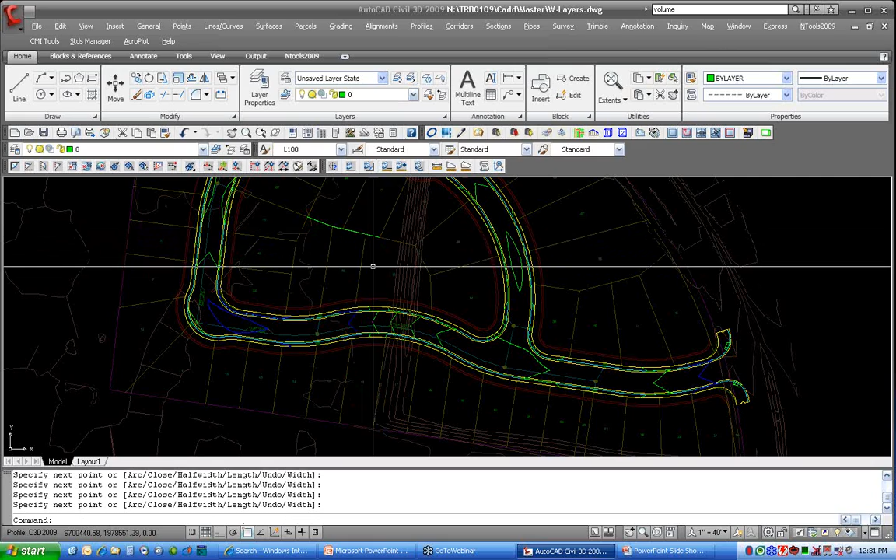I guess it helps if I turn on my object snaps. So you can see I can still snap to the end point of these lot lines even though they're locked. Whereas with the old layer isolate in AutoCAD 2007, it would turn off or freeze the layers you isolated, which didn't do me much good — I couldn't use those for anything.

All right, last thing I'll finish up with, let me unlock that — there we go — is XREF clipping. Now they have a new feature where I can clip an internal area. For example, on this drawing, I'd like to clip my existing contours in my site. In the past you'd either clip with a skinny island and do an area around that and also around the outside, or you'd XREF it twice, insert it twice, and clip them both. It was a cumbersome process.

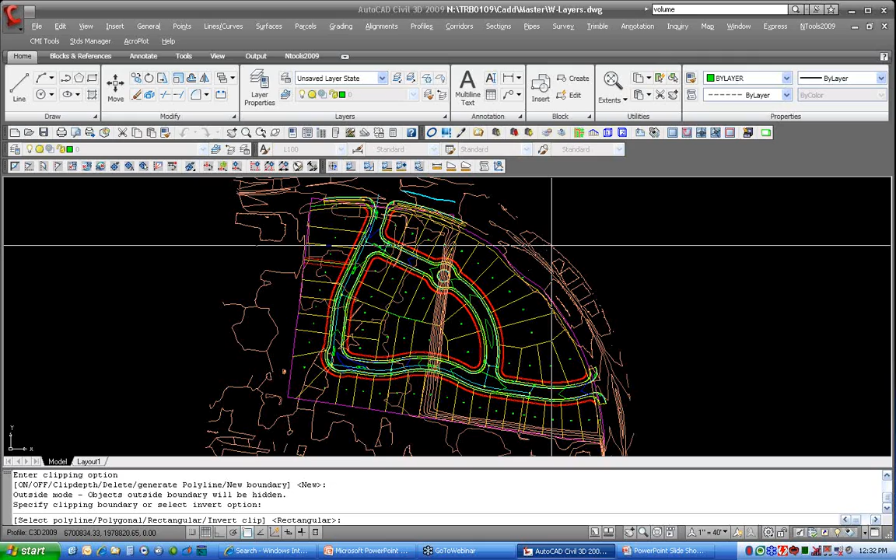So I'm going to use the XClip command and just clip my contour drawing here. I'll make a new boundary, hit return for new, and I need to specify that I want to invert my clip boundary — that's the option on the command line. So I'll do I for invert, then do a polygonal boundary. I'll turn my object snaps off since I don't need to be that precise right now, and click my way around the outside boundary, kind of sloppy, then return, and you'll see it clips out the XREF within the boundary.

Unfortunately, I can't switch that once I've defined it. If I want to switch it, I have to undefine or delete the clipping, and then clip the XREF again to change it to either the invert or normal mode.

All right, went about a minute over what I wanted to do, not too bad. Next week's session we'll start off with 3D viewing, the action recorder, and then we'll spend a lot of time going over annotation, annotative text, and the MText options.